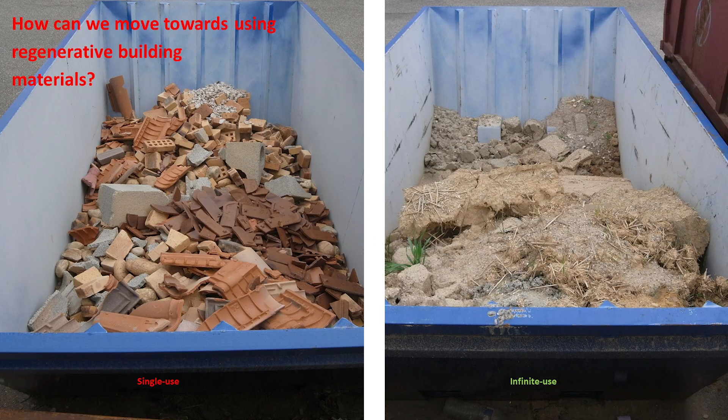So yeah, moving from resource depletion towards regenerative building materials. So how do we do that? What we currently have within the construction industry, and us as designers and architects, is that we deal with single-use materials and produce single-use buildings, but we want to move to infinite reuse, which we're still not at. So building with earth is the greenest solution we have got. That's very important to keep in mind.

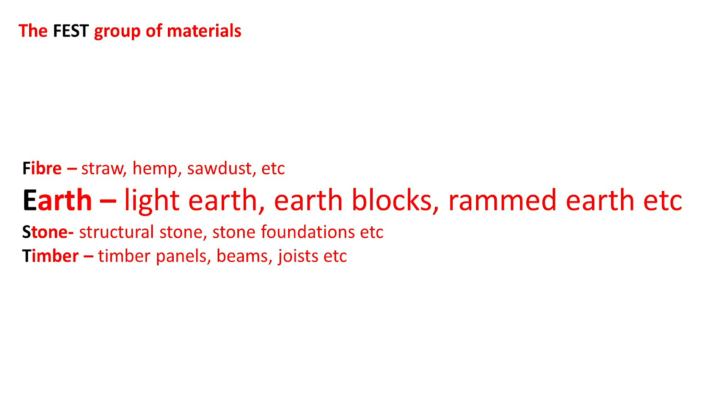What we have is what I call the FEST group of materials. We've got fibers, natural fibers like straw, hemp, sawdust. We've got earth, from which we can make light earth blocks, etc. We've got stone, structural stone, stone foundations, and timber. And those four categories form basically everything we should be working with. Everything else is just prolonging the problem and delaying tackling the issues.

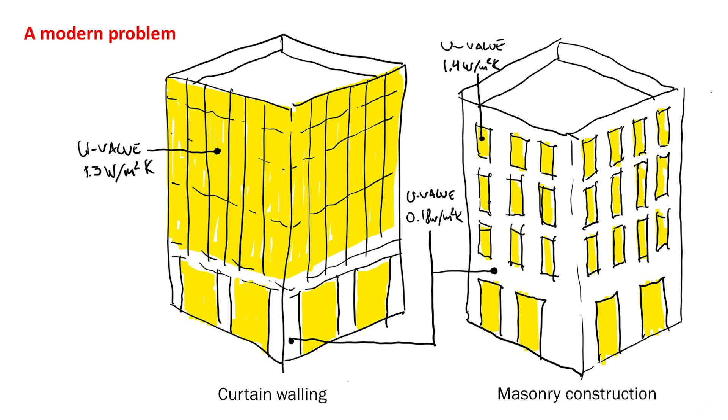We've got a problem. Amongst many problems, we've got a modern problem. If we've got a curtain wall building, the U value for the glazed part of the building, which may be 20, 30, 40 meters, would be 1.3. And if this was masonry, it needs to be 0.18. So that's very strange. Both of them pass building control.

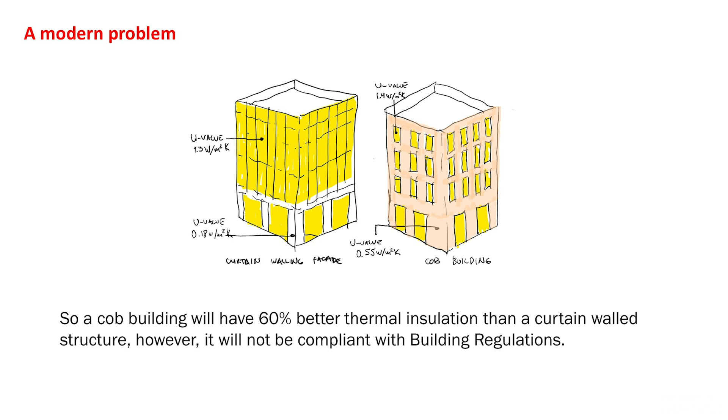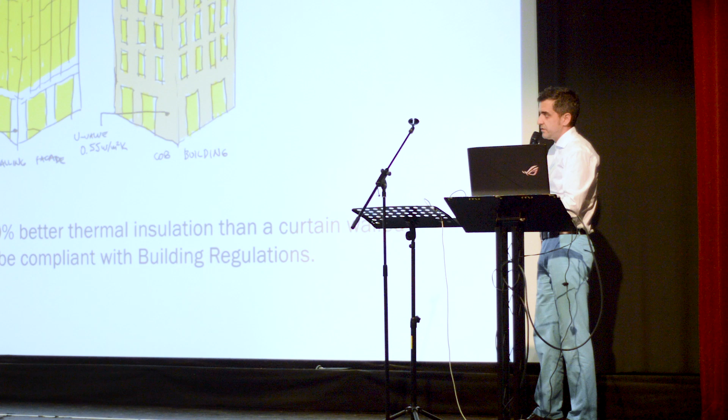But if one of them is a traditional COB building with 600 millimeter thick walls, it will have a U value of 0.55, and the curtain walling is still going to have 1.3. And there we are: a COB building with 60% better thermal insulation cannot pass building control. And this is one of the main issues. We've got materials, but effectively we're not really allowed to use them the way we can.

But let's go further back. How did we get here? The oldest surviving houses are built of stone because in the 12th and 13th century, construction in timber was incompatible with durability. In the 15th century, we've got the yeoman's house. In the Middle Ages, Kent's largest yeoman's house could easily take 70 to 80 large hardwood trunks, at least 100 years old, for the main frame, and another 250 smaller trees, up to 20 years old, for the joists, studs and rafters.

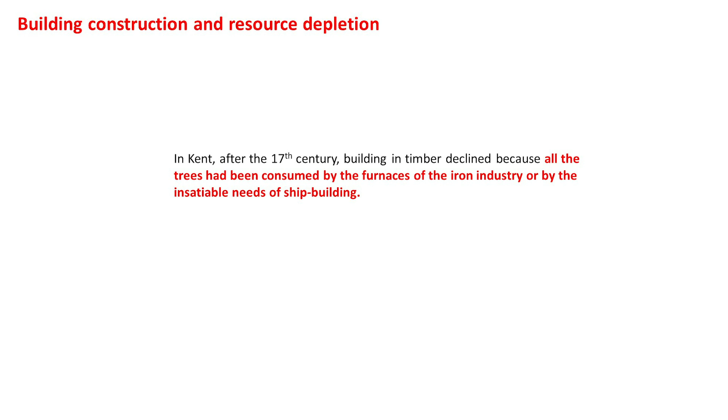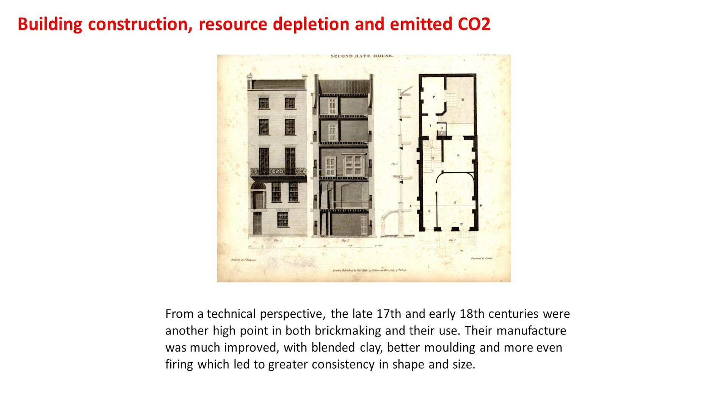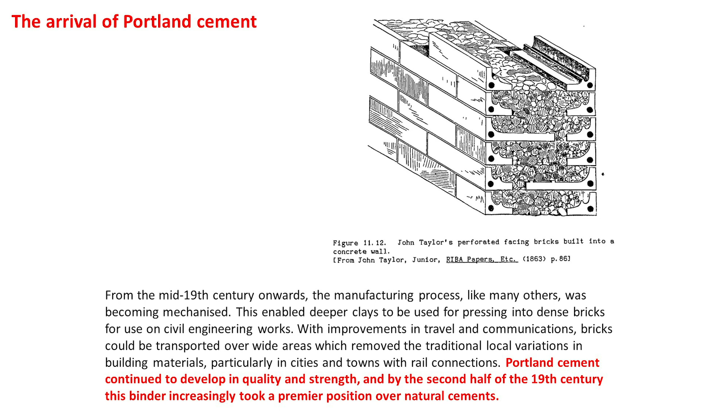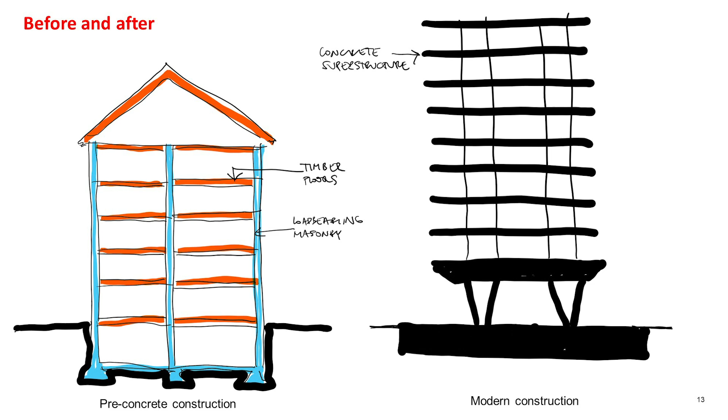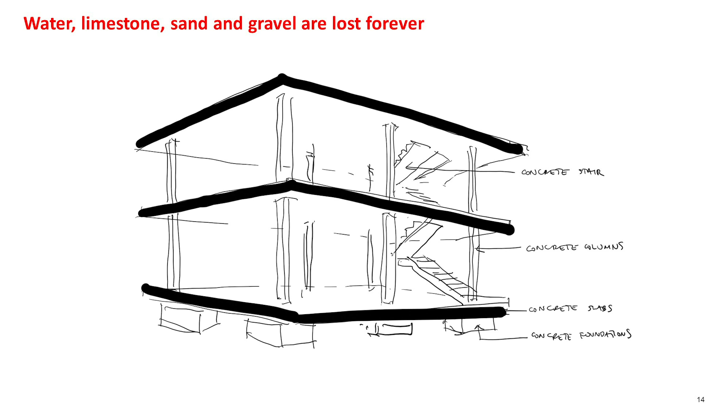Then, early 20th century, the big earthquake followed by a huge fire in San Francisco, with one building left that happened to be reinforced concrete, seems to have persuaded the majority of people to move in that direction. So it's the before and after. Before concrete, larger buildings mostly had load-bearing masonry and timber floors, and after that, everything was infilled with cement, sand and gravel. All these huge voids need to be pumped full, where water, limestone, sand and gravel are lost forever. More than 100 years later, the concrete tap is still running.

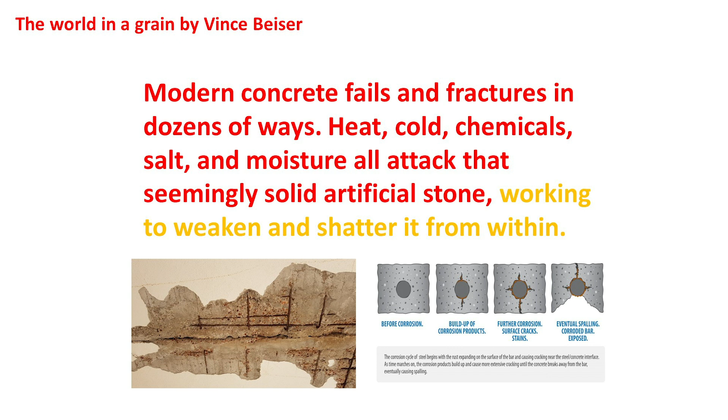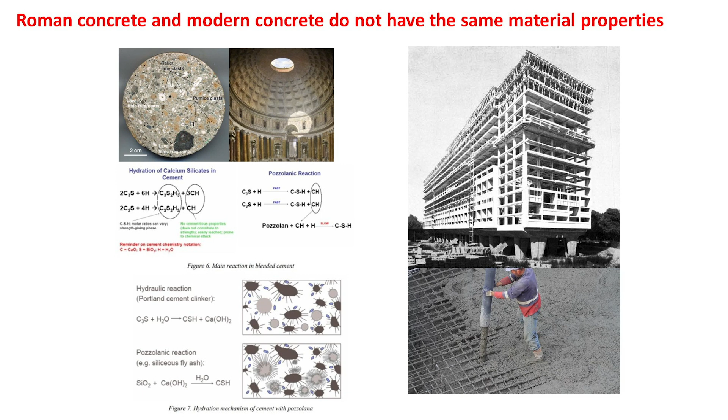At the turn of the last century, modern concrete was thought to be as permanent as the stone it mimicked. None of that turned out to be true. Modern concrete fails and fractures in dozens of ways. Heat, cold, chemicals, salts, and moisture all attack this seemingly solid artificial stone, weakening and shattering it from within. And there is a misconception between Roman concrete, which stood for hundreds and thousands of years, and modern concrete, but they're not the same material. They don't have the same chemical bond or the same ingredients, and they behave completely differently with weathering.

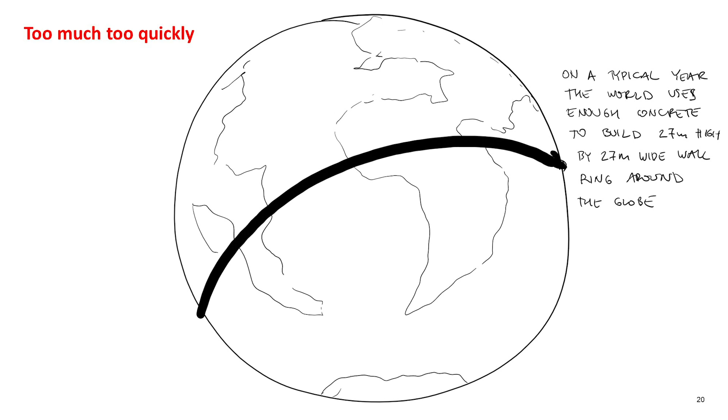Apart from that, we've got not only global warming, but we're also running out of sand. In a typical year, the world uses enough concrete to build a 27-meter high, 27-meter wide wall around the globe.

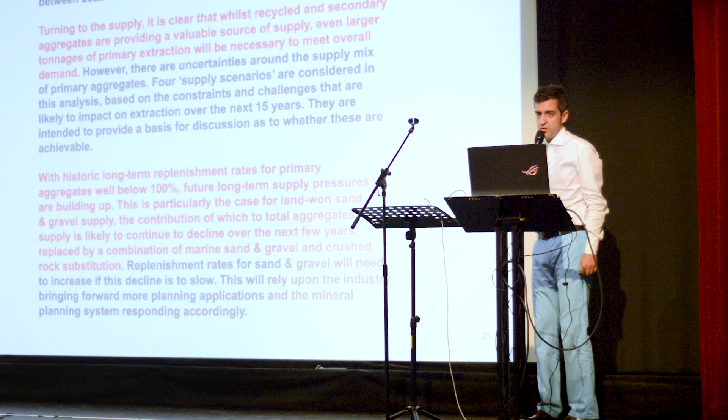But even when you look at the industry, the mining industries and gravel and sand industries guidance, this is an extract from the MPA document, you can see that even they are spelling out the fact that we've got a big issue. And they're talking about an increase from 253 million tonnes in 2021 to 323 million tonnes by 2035, a level not seen since the 1980s.

Turning to supply, it is clear that whilst recycled and secondary aggregates are providing a valuable source of supply, even larger tonnage of primary extraction will be needed to meet overall demands. With historic long-term replenishment rates for primary aggregates well below 100%, future long-term supply pressures are building up. This is particularly the case of land-won sand and gravel supply, the contribution of which to total aggregates supply is likely to continue to decline over the next few years, replaced by a combination of marine sands, gravel, and crushed rocks.

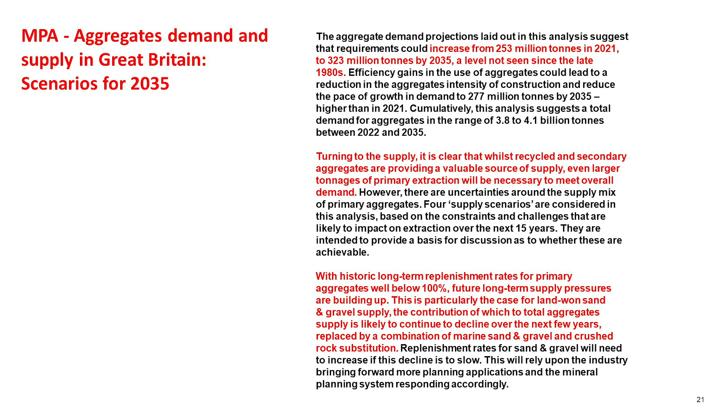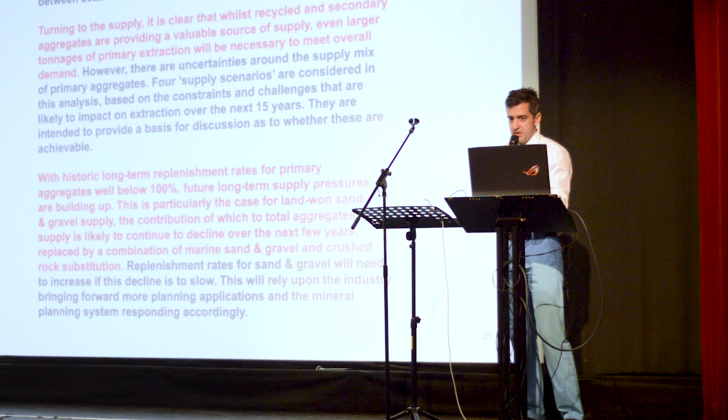So obviously, marine sands has huge environmental impact, and it's extremely carbon intensive, and it's obviously something that we shouldn't be doing. But in a way, they're spelling it out. We've got an issue. We don't know how to solve it, but we've got an issue.

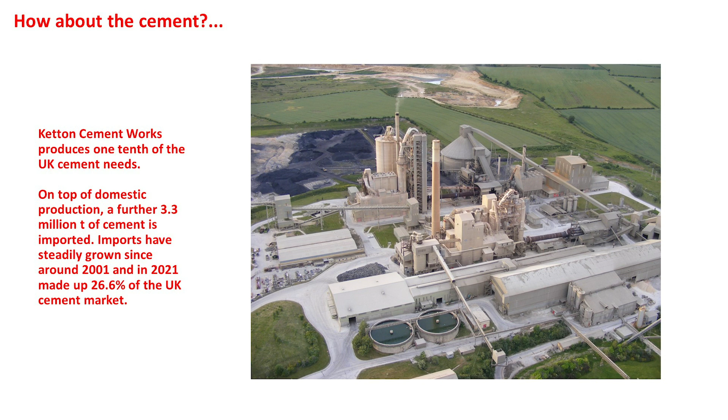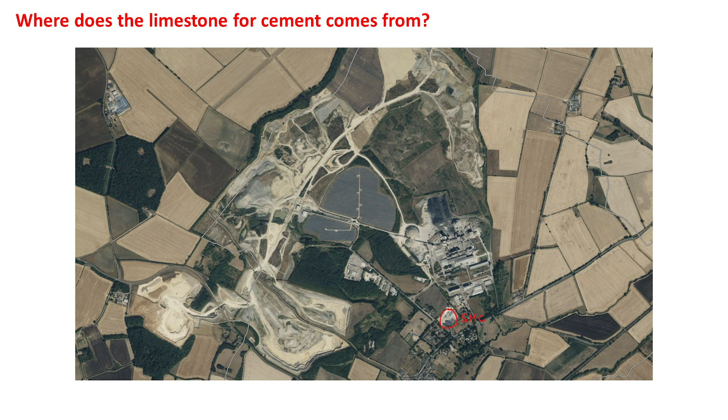But how about cement? So this is a photograph of Ketton cement works, which produces a tenth of the UK cement. And where does their limestone come from for the cement? So that's the location of the quarry, and you can see the factory for the cement is there. But when you look closer, it's a huge quarry. It's empty and there's no mining equipment. So that was really strange to see.

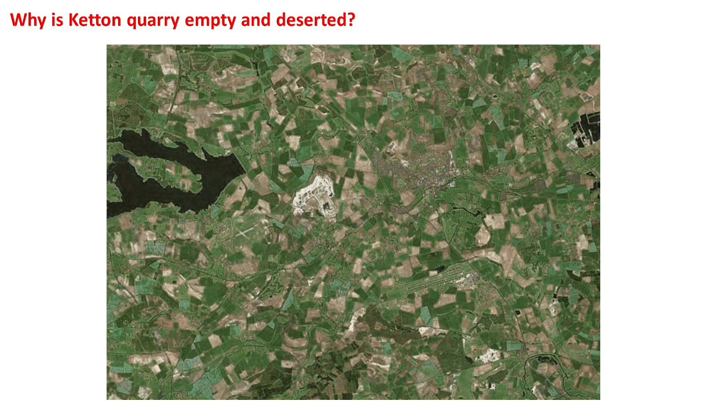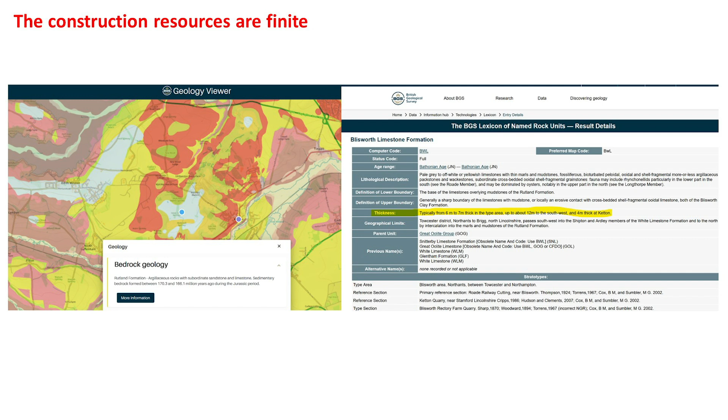And when you zoom out further, you see these white dots, really small dots, scattered all around. And when you zoom in on them, you find lots of mini mines scattered around. And then you wonder, why are they doing this? And you go to the geology viewer, and you see that actually the limestone at the quarry around the factory is 4 meters thick, which basically means that they've used it all up, and it's empty.

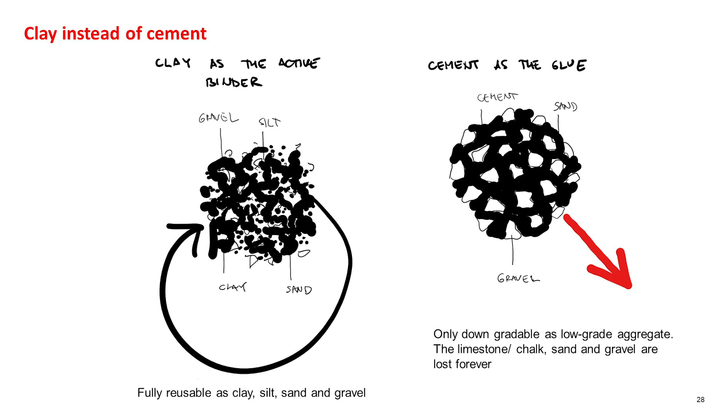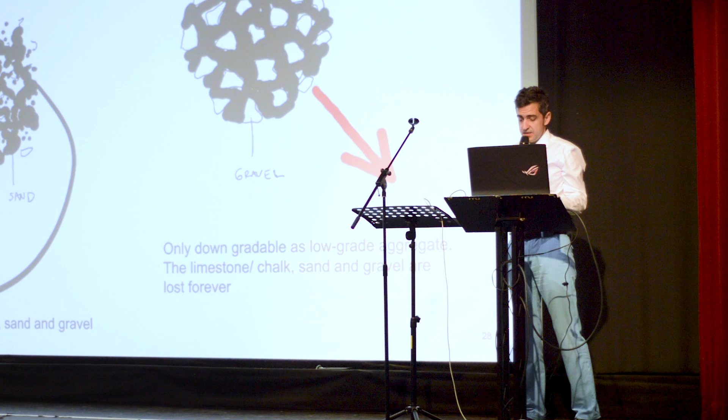So clay instead of cement. So again, those are the two things. One, clay being the active binder, which is combined with various fibers to produce light earth, plasters, etc., which allows this circularity and infinite reuse. And the other is cement as the glue, where afterwards the resource can only be downgraded.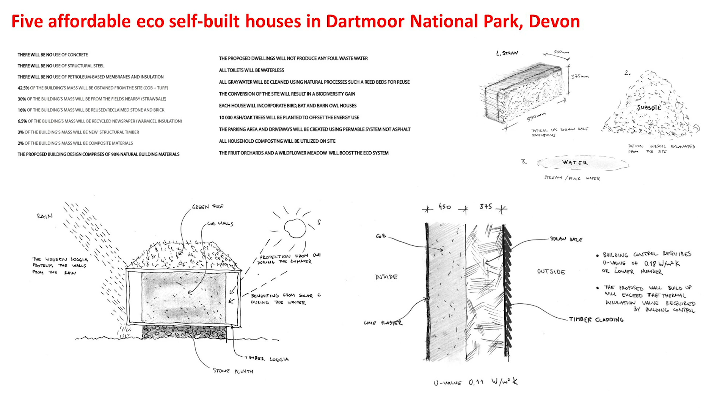And then I'm going to take you through a few projects that I've done over the years. This is something that I did back in 2015 when I was living in rural Devon. We formed a Community Land Trust, and I did a design for affordable eco self-build, which was for Passivhaus. And I had the privilege to meet Barry Honeysett, and he was the engineer on it. And through his knowledge of the material, we developed a design for a very straightforward cob building, 450 cob and straw bale on the inside with some timber cladding.

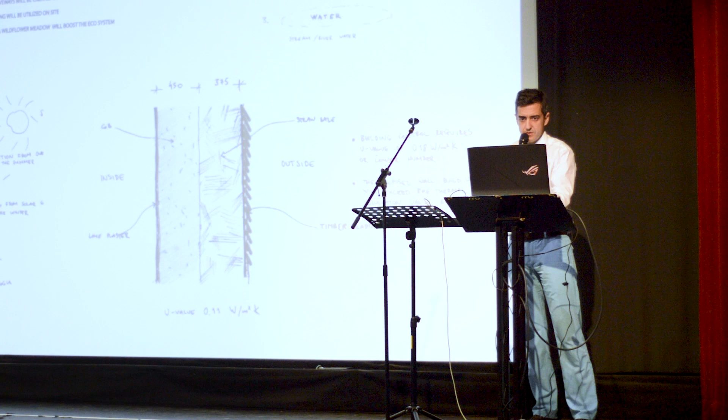But the whole point here was that it got me going on using the material from the site, using the straw from fields nearby, and not using concrete, etc. So that was my first insight into that world. This is Barry's section of his design with concrete-free foundations.

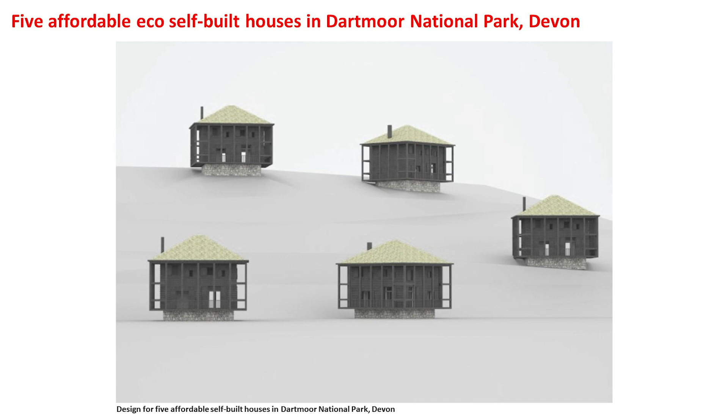And then again, we had things like planting 10,000 oak trees to offset the carbon of the construction, wild meadows, reed beds cleaning the grey water and improving the biodiversity outside, etc. And this was a visual of those houses. So this didn't go anywhere. We didn't get anywhere with the Dartmoor National Park. And after a couple of years, I came back to London.

And then I started to wonder, is earth construction scalable? So I managed to get in touch with some good engineers from Expedition Engineering. And we took part in a competition for a new university building in Sofia. And again, we had a look at the soil reports, and it was good for rammed earth. So the design was for 30-meter high rammed earth walls, and this is in seismically active Bulgaria.

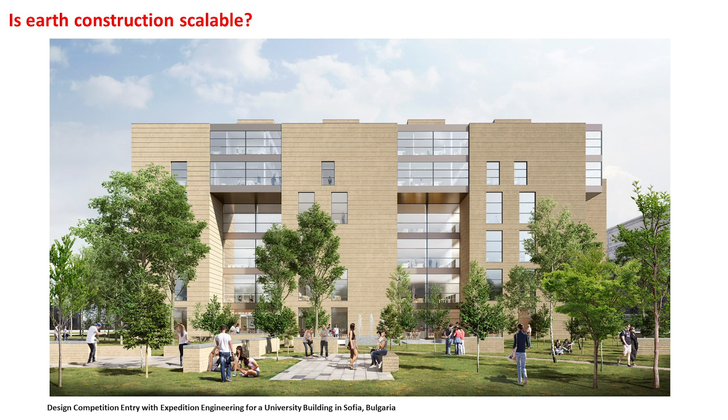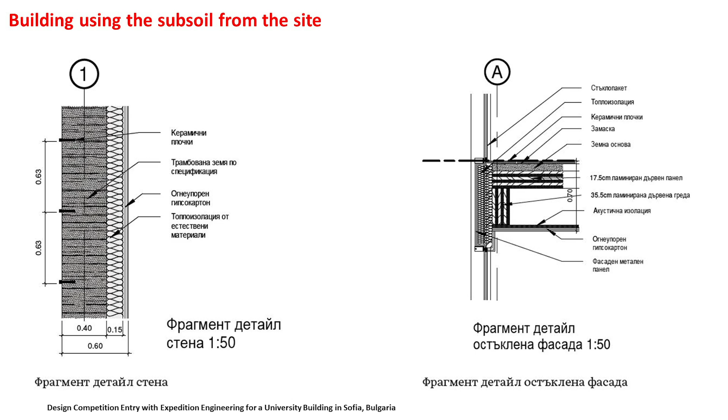Yeah, so Expedition Engineering did all the calcs for that. So it was a 40 centimeter thick wall with insulation on the inside, but then of course it's a self-supporting facade rather than load-bearing. So behind that you had a timber superstructure to carry the floors. And so one interesting thing is that we also went for earth screed below the floor tiles instead of cement screed on top of the CLT. And then when the engineer did some calcs, he also said that that potentially could really help with seismic activities and kind of counterbalance.

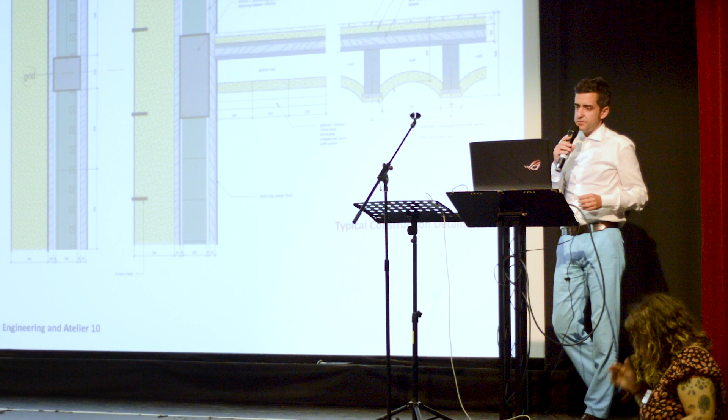Following that, we did another competition with Expedition Engineering, and this one was also with Atelier 10. And in this case, actually I started thinking that you have to design the material system before you even start designing the building. So you needed to first find out what you're working with, what you can do with it, how you can use it, and then you see what kind of spaces this would lead to, which is something very uncomfortable for an architect because we don't tend to think in this way.

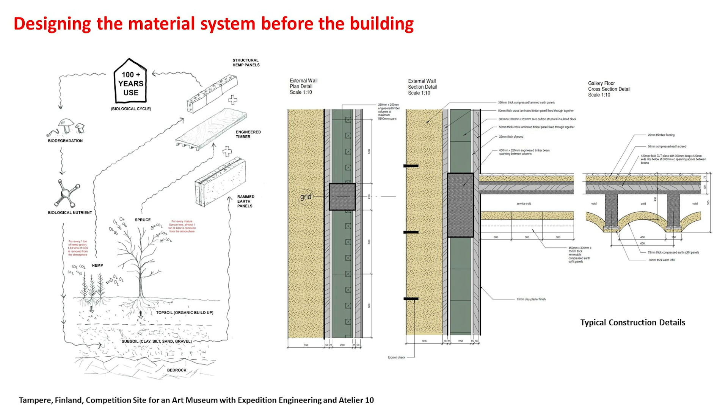So here the selection was, again, soil from the site, hemp panels, structural hemp panels for the walls, and then you had timber frame as well with ribbed CLT panels spanning across. And here also, again, we went for earth screed, and then we also had these earth panels lining the soffit as well. So it's almost like I tried to think of a way of stuffing as much earth as I can within the building. So this is the visual.

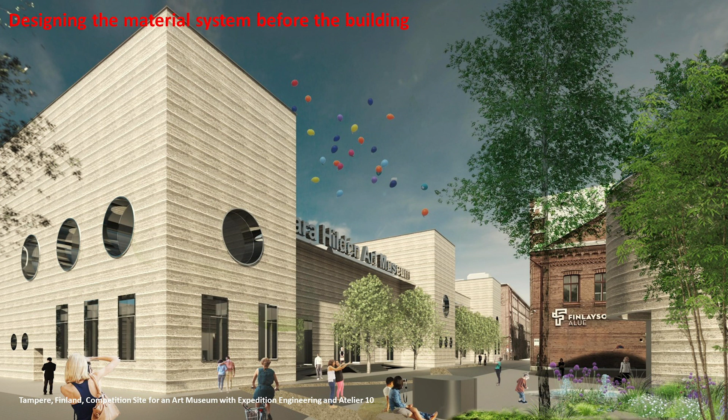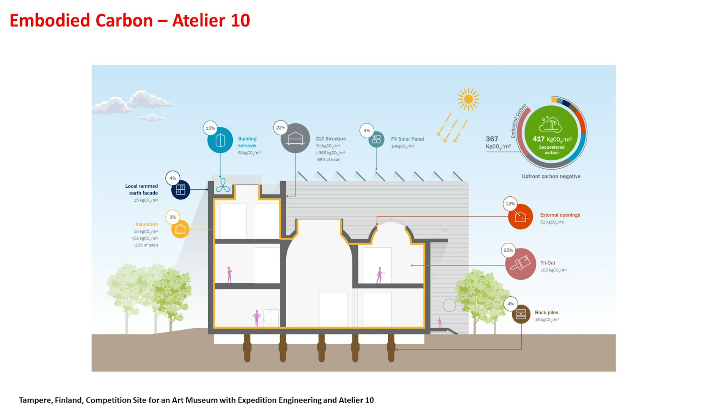Again, the external is all based on Martin Rauch's way of building larger panels and lifting them and placing them on site, because it's a convincing way to put in a presentation, especially for somebody who is not familiar with this type of construction. So yeah, Atelier 10 did the carbon calculation, and then they came up with the figure. And when we put that figure into a chart, I should have said that actually we also had the concrete pre-foundations here. We did rock piles, vibro rock piles.

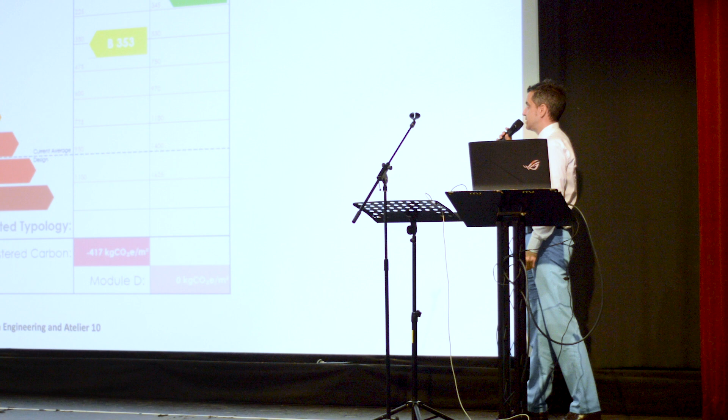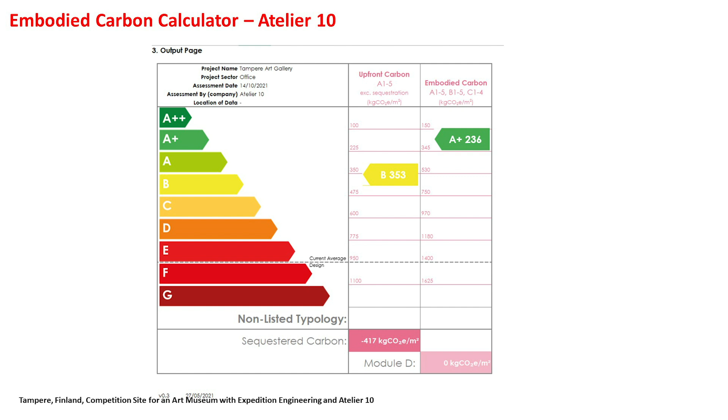But yeah, when they did the chart, to me it was quite shocking that after all that, going for as local as possible, majority natural building materials, lots of fibers, timber, etc., lots of earth, you're still just between B and A. And then you're thinking, what does one need to do in order to be A+ or A++? It's bonkers.

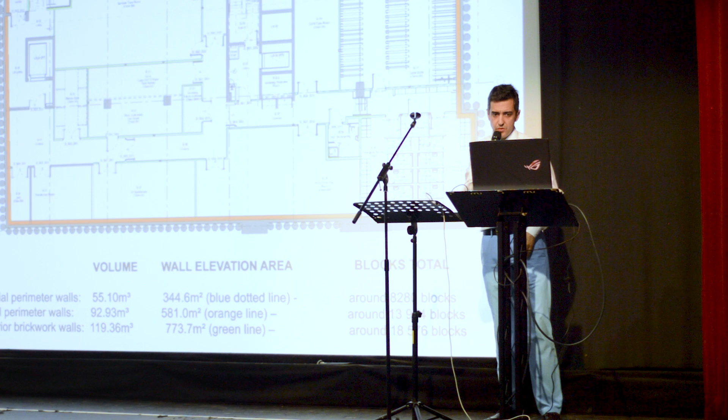So moving on then to the Tribeca. So this is a job which has already been built. It's in central London, next to King's Cross, for a large developer. We had a typical concrete frame building, but here I managed to move the conversation with the client and the contractor early on, with the help of Rowland Keable, to perhaps start to use the soil from the site for the internal walls of the basement. This is where we had blockwork specified.

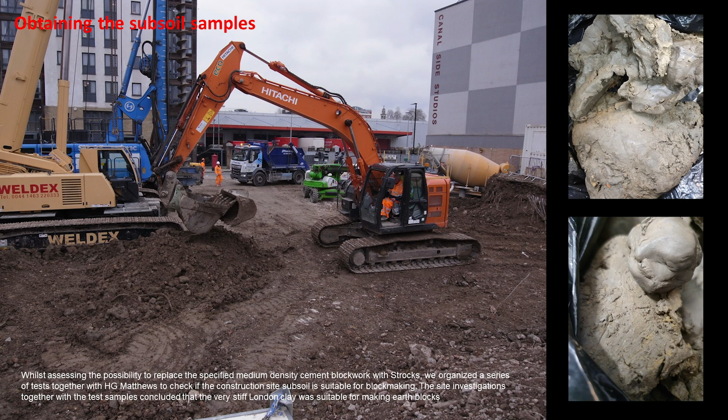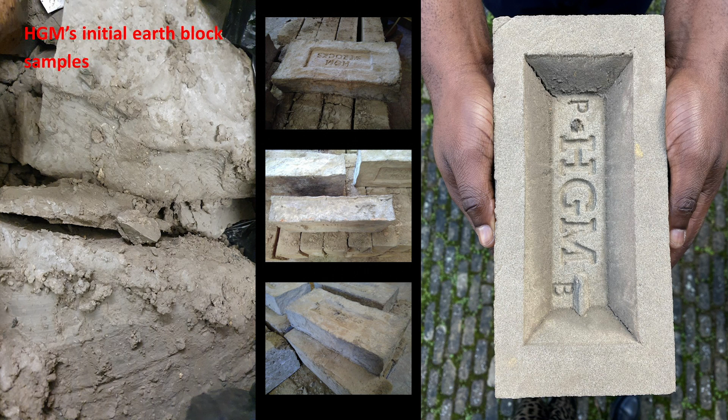And with the help of Rowland, I went to site. I asked the builder to give us some fresh samples as the pile rig was pulling out of the soil. I dropped them off at Rowland's place, and then he went to H.G. Matthews to the factory, played with them, and then made this block and gave it to us. And by that time the client still didn't know anything about it. Then we took that to the client, presented it, told them that's their material and it comes from the site, and they loved it. I mean, they were cautious, but then they really loved the idea. So we continued pushing.

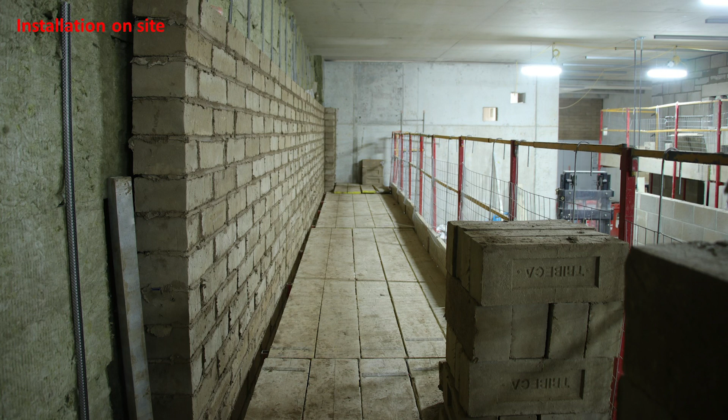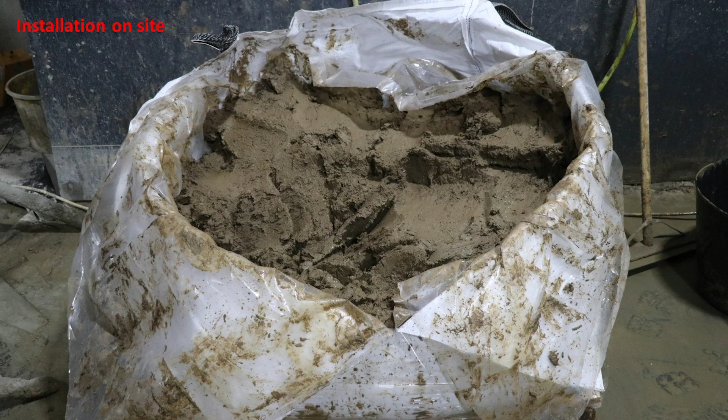Then Roland and H.G. Matthews did more blocks and did various tests, and in the end we managed to do it. We managed to do all the internal perimeter walls, so not the dividing, but the perimeter walls, with earth blocks from the site. We had to do 3 different mixes, and unfortunately the structural engineer selected the strongest mix, which had a lot of added sand. But nevertheless, the important thing is that it happened, and the mortar also came from the site with added sand. And this is one of the big rooms, which will now be a lab space, a laboratory.

And the earth blocks here are almost 6 meters high. They're obviously tied back to the concrete wall, but yeah, it's self-supporting. The engineer had a nightmare, but we managed to get there.

We were also lucky that the block layers were from Moldova, and apparently a lot of their grandparents' homes were constructed with earth blocks, so they were very familiar with that, which was a big surprise and very lucky. Photographs of close-up of cleaning them.

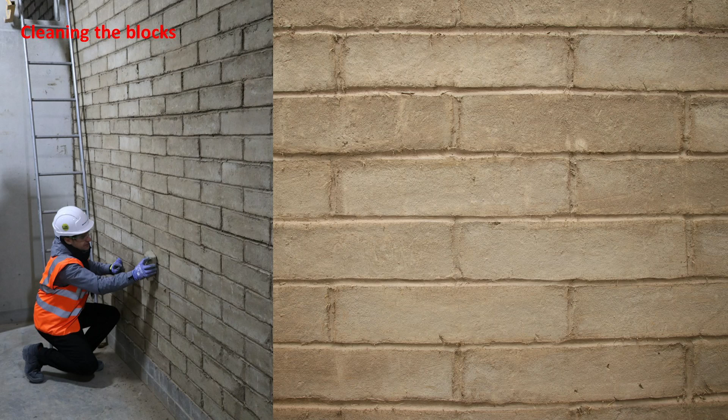So following on from that, the site next door is the same client. Although we are now not the architects on next door, we designed the planning, but they selected a different delivery architect. We managed to convince the client plus the architects and engineers and the contractor to do the same next door. So in a way, in this instance, the site is the quarry again, much more than it was on the first phase.

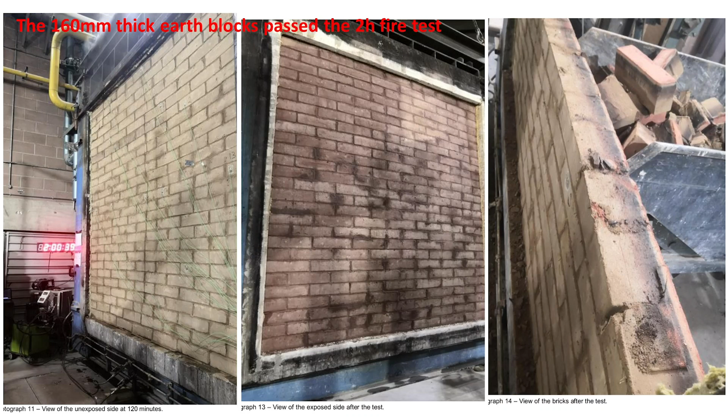And then a lot of the soil is already at H.G. Matthews now, and we're basically having various tests done for justifying doing the internal dividing wall. So this is the test H.G. did for the fire test for the earth walls. And it passed our fire resistance. So again, for the next phase of the development, internal walls with fire rating up to 2 hours, those blocks can be used there.

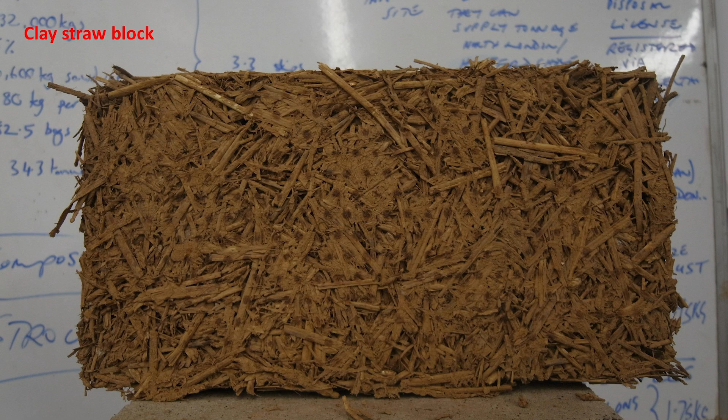So other blocks that Roland is playing with at the factory are light straw blocks, and this is something that again we've got a strong interest in. We want to find different products and different solutions that we can then implement in business. Over the last year I have been attending the factory once a week, where we had meetings, we test various things and discuss how things can progress forward. And it's been extremely fulfilling, and a lot of very insightful information and ideas have come through.

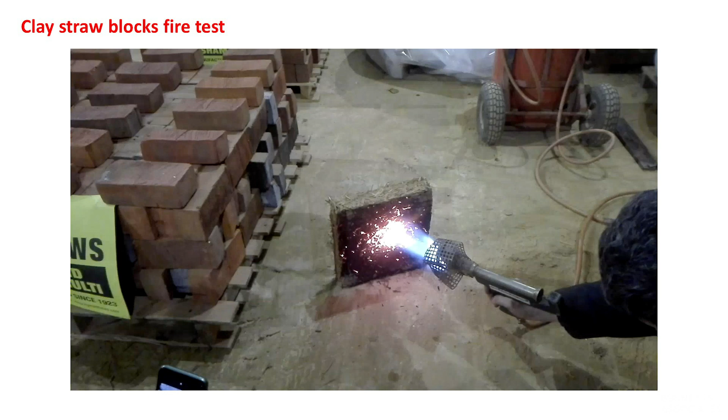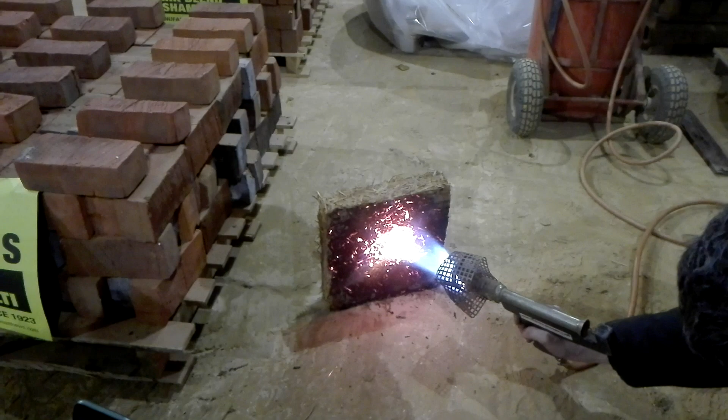So this is basically the straw clay block fire test that Jim and Roland did at the factory. Roland has been playing with different mixes to make a mix which does not catch fire. As you can see from the video, it basically chars on the other side, but nothing really happens to it. And this is not even that thick a panel. I'm not sure how thick it was, 50, 60 mil, something like this.

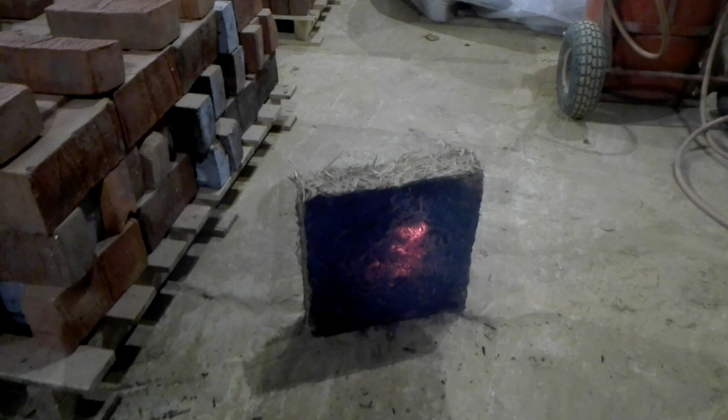So nothing happens. I think at the end Jim's hand gets too hot from the torch and from the reflected heat from the clay block, so he just has to let it go. But as you can see, nothing happens; the moment you take the flame away, it all just kind of self-extinguishes.

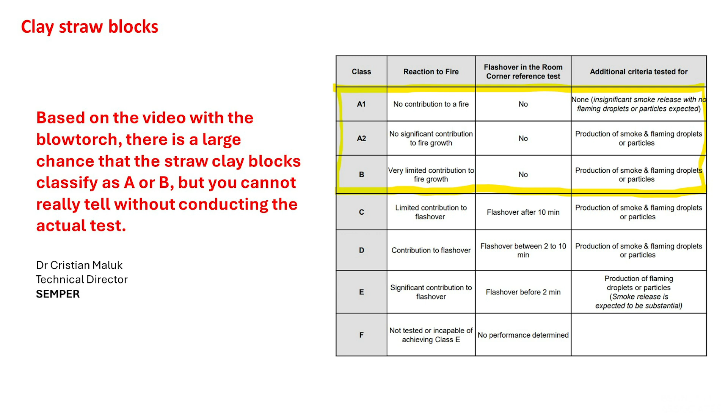So afterwards, we sent this video to a highly knowledgeable fire engineer, and he said, based on the video with the blowtorch, there is a large chance that the straw clay block classifies as A or B, but you cannot really tell without proper tests. But still, we have a very different perception of those materials, and we think, oh, there's natural fiber, it's gonna catch fire, etc. But actually, if you go through rigorous tests, if you adjust the mixes, we can come up with products that can do the right thing and can be scaled in larger buildings or large scale applications.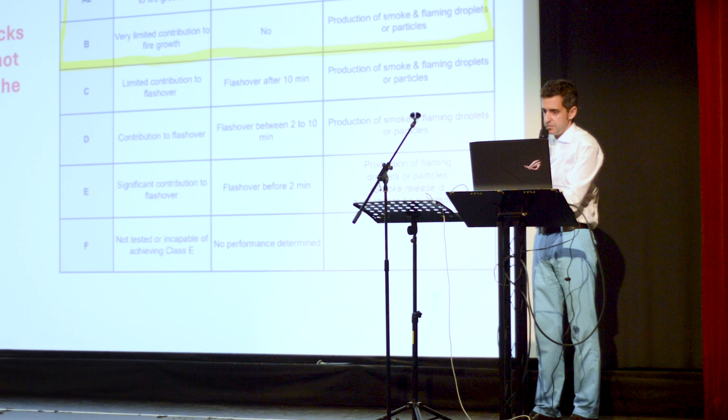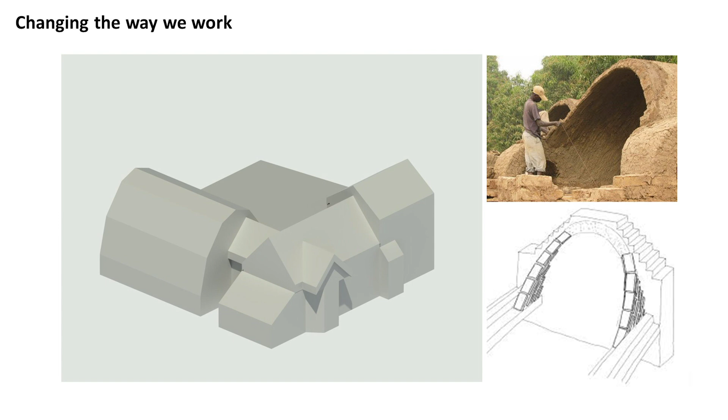Quick one, for H.G. Matthews we're potentially looking at extending a pub for them, and the brief is to basically do a vault using their blocks. So again, here, the design process was very different. Rather than starting by looking at plans and ideas of shapes, it was: what is the material, how can you use this material, what is the vault technique that needs to be used in order to be able to create the shape, etc.

And this was like, with Roland, we spent quite a few hours just discussing that and going through the various different vaulting techniques. And it's this kind of insightful knowledge from people who understand the material and people that will work with the material that is crucial for us as architects to be able to actually design with these new materials. We can't do this by ourselves. So we really need the earth building industry's input and knowledge in order for this to happen.

So again, this was one of the sketches that we did early on about how the vault will be, the curve of the vault, how it will be shaped, what kind of blocks, because again, we need to work with the standard blocks, how they can be cut and how many, etc. And again, in here, the brief would be blocks, then straw clay insulation, then locally sourced timber, which would be split for cladding, cleaving planks, and then concrete-free foundations with shingles.

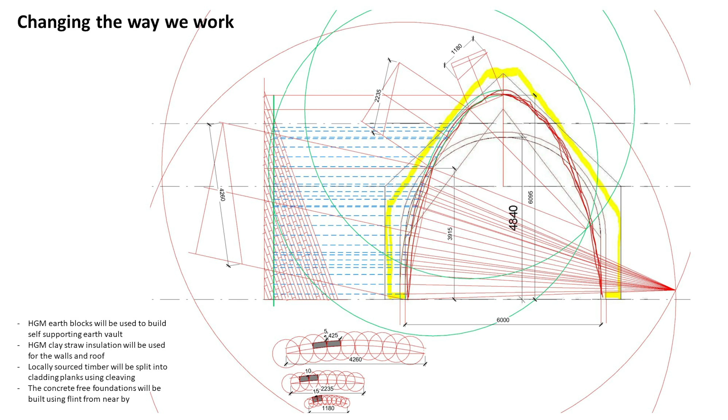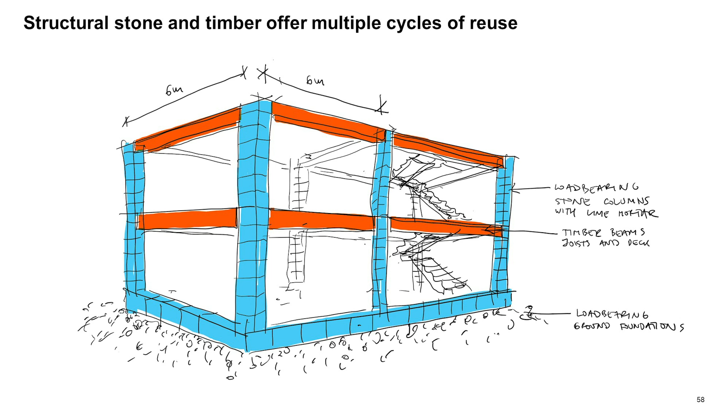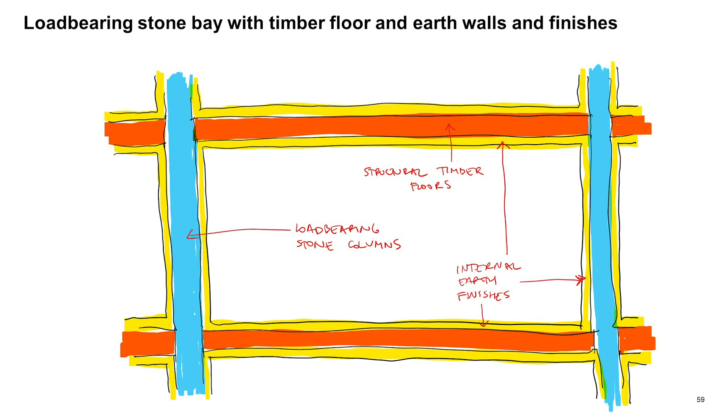So we've got resource storage versus resource depletion. These are in a way the two options we have. What we're currently looking at is structural stone for the columns and timber for the floors. That will give us a base, and I'm talking more about larger buildings, where internal dividing walls, internal partitions, are light earth, earth blocks, earth screeds, and earth panels for the soffit, and then clay plasters, etc. That's just an illustration of what that would look like.

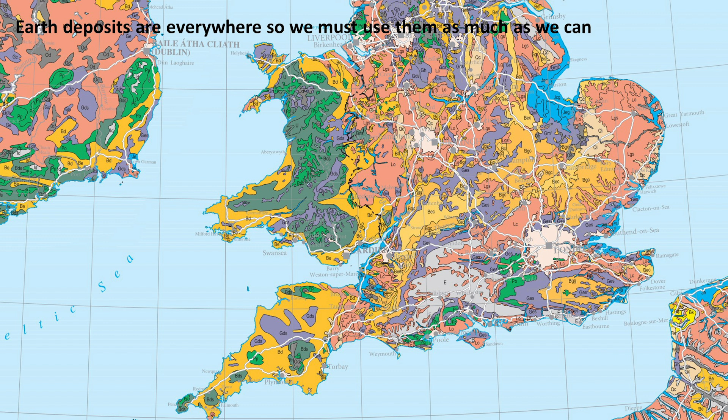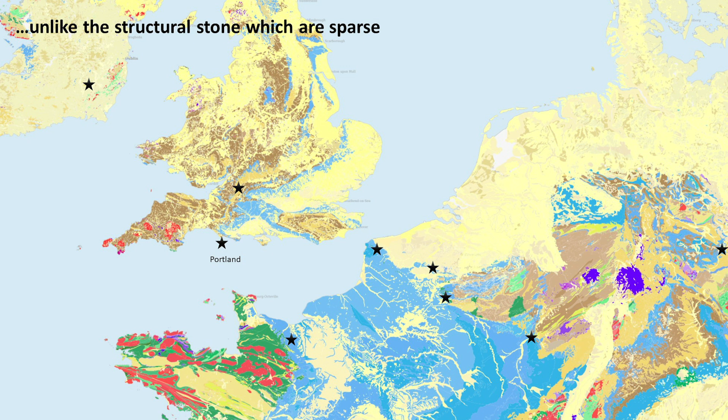When you actually zoom into the map, you only have the Isle of Portland, then a little bit here, and everything else is actually chalk. So that really good limestone, which we can use structurally, we don't have that much of. So again, it's very sparse when you look at it from that bigger map. There is not that much there that can be used. And when you go into the section, it's only below the top layer. Then there is the series that is basically the limestone we can extract. Everything else is not good for structural use. So in terms of depletion, what we've got is limited, and we really have to use it in the best possible way.

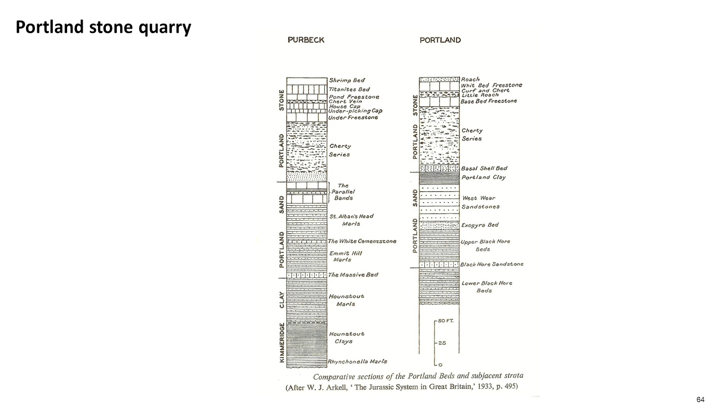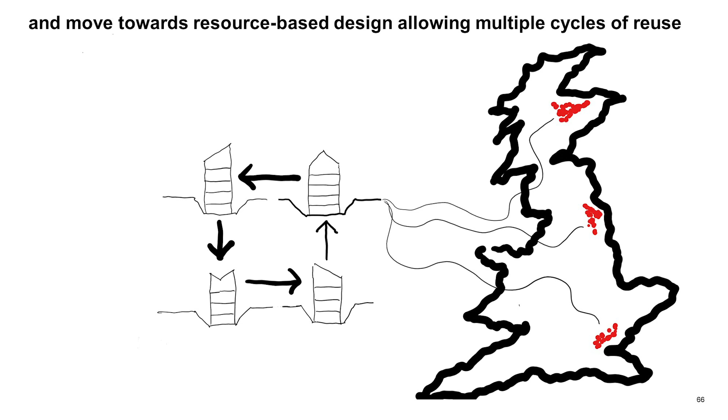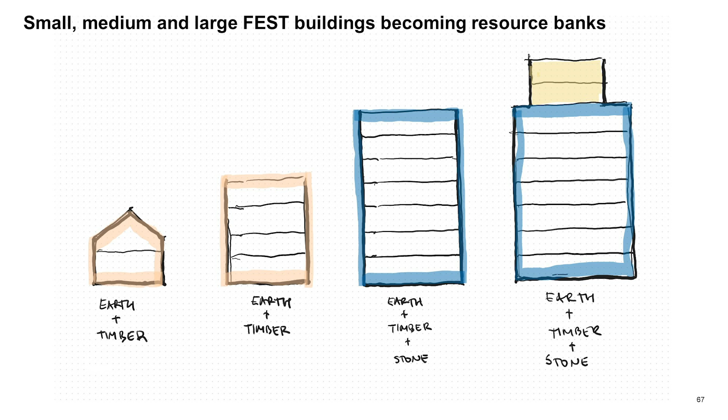So we have to move away from single use resources and go towards infinite reuse, where you have multiple cycles of reuse. And this is a little illustration, the last slide, and hopefully it will make people think about the different scales of buildings and what we can do. The small and medium scale is where earth must be pushed as hard as possible, even structurally. Then you've got the medium to a bit larger one, where it's a hybrid of earth, stone, and timber, perhaps for the top bit. But at some point buildings become way too high, way too wasteful to even bother doing anything about it.